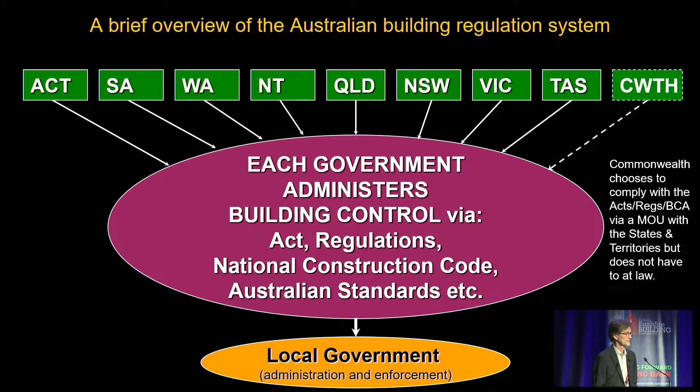Just because we've got a referendum coming up, I thought this was worth adding. The Australian Constitution is really clear about this. It was the Commonwealth of Australia Constitution Act set by the UK Parliament, of course, because Australia didn't exist. And it essentially says that laws that existed within the colonies will remain with the states. So that's the great challenge for us, isn't it?

The National Construction Code has been the great reform of my lifetime, but it's struggling at the moment. It's falling apart. Part of it is this frantic attempt by states to catch up with climate change and other pressures. It's not deliberate, we're not doing it deliberately, but it is a problem. And if nothing else, all of us after this conference can go back to our day-to-day jobs and have some small amount of influence on our politicians to say that we have to treat bushfire as a national issue. It's not a state issue. Bushfires do not care about state rivalry.

So, in terms of 9 different governments and 8 different regulatory schemes, the things I can say for sure occur in every state and territory are that we have 3 prime sections: a design process, a building process, and an occupation process. Pretty much all of us in the room will work in one of those sectors, sometimes 2, very rarely 3. The critical compliance points in law are at the end of the design process.

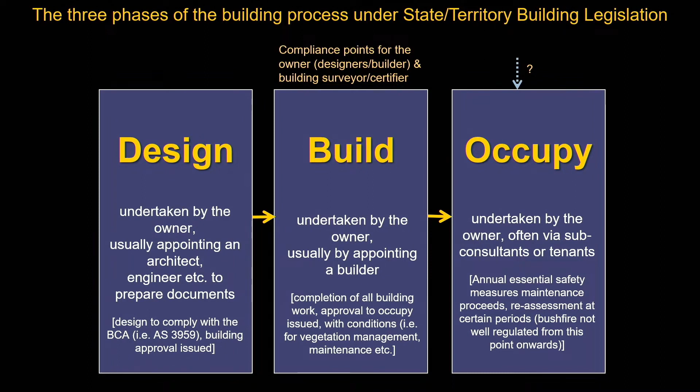At the end of the building process, we have completion of building work and approval to occupy, particularly issue of approval documents, occupation certificates, for vegetation management, maintenance, etc. There are some interesting presentations coming up this afternoon on that, which I'm particularly interested to speak about. Then there's the occupation process, and of course, that's where the big question mark is at the moment. We haven't done much work there. We've certainly never had national requirements for significant retrospective recompliance for housing.

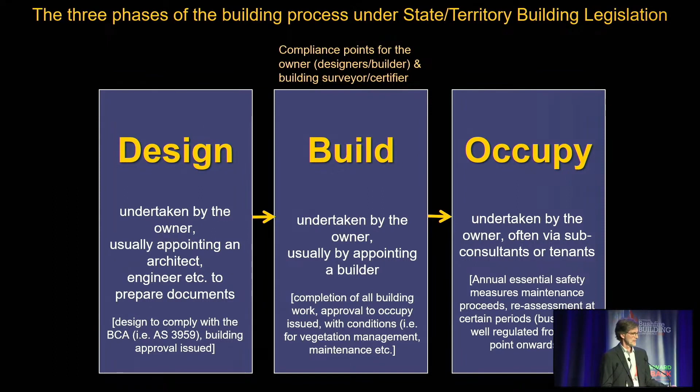Bushfire life safety, that's the prime goal of governments and the National Construction Code. So making sure we keep people safe enough—not so that no life is ever lost, but safe enough—and I'll come back to that.

Then we have private interest insurability. There's a presentation this afternoon from the Resilient Building Council about the insurance challenges we're facing. The insurers are just in the business of making money, and if the fires are greater, the premiums have to go up. For example, New Zealand has had a natural disaster fund for decades because of their earthquake risk.

Maybe we need to start talking about whether we would have a nationally funded insurance scheme. But as soon as I say that, I feel like I'm a socialist and I'm going to be criticised, because that's a political issue, isn't it? But if we all contributed something, even the people who live in cities, to a national disaster fund, like New Zealand has done—they funded the rebuild of Christchurch after the earthquake with that $6.3 billion, I think. They emptied the bank account, but they're now refilling it.

Of course, the last issue is where the Class 9 provisions really start to hit the ground now. This is the public interest building protection, the secondary goal of governments and the National Construction Code. Some of you might have a view that the National Construction Code is really only about life safety, but that's not true. It's fundamentally also about property protection, but only in the public interest.

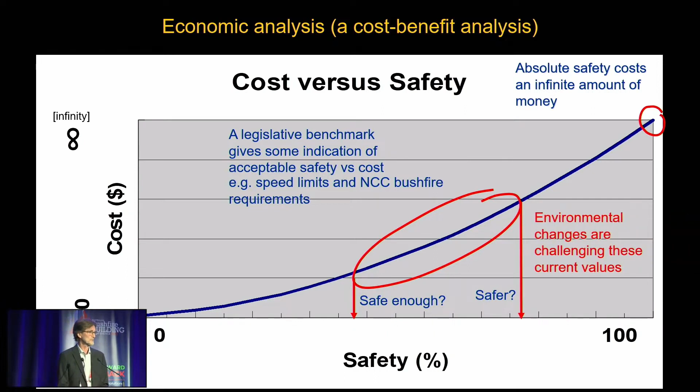Cost versus safety. Again, building codes are not the word safe is a problem. I do a lot of legal work now because of a whole heap of compliance issues. And sometimes lawyers say, is this building safe? And the answer has to be, well, that depends. Compliance, safe means different things, and governments spend all of their time trying to regulate what is safe enough or safer. The reason I put this slide in is because, frankly, environmental changes are challenging those current values.

You might be surprised to know, but some of you will already know, that most of the Australian standards that we've got in the building code, in fact that we've got nationally, were developed from the last 50 or 100 years of data. We look backwards to work out what the future should be. And guess what climate change is telling us? That doesn't work anymore. So one of the things we spent a lot of time at the Australian Building Codes Board discussing at board meetings is, what is the factor you would add to those codes for climate change? And if you have an answer, please go grab me in the break, because we have no idea.

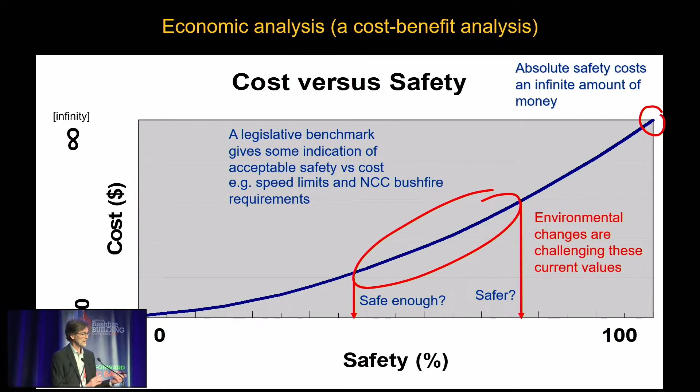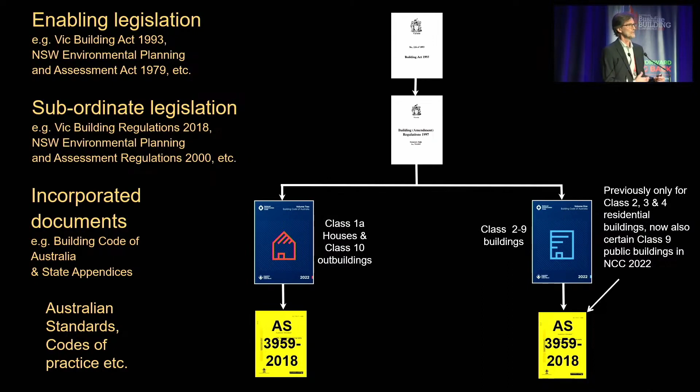So in every state or territory, you have an Act, Regs, BCA and standards. 3959 sits awkwardly there at the bottom of the table, given most of us spend a lot of our time dealing with this code, but it's important to remind ourselves about that. The building code used to previously only deal with housing. And again, one of the challenges of emerging regulatory issues is that we start with where the problem is. Losing thousands of houses in bushfires was a problem, and we weren't losing thousands of hospitals or schools.

We occasionally lose hospitals or schools, fortunately without loss of life usually. That actually goes against another policy problem, because if you lived in a cyclonic area, you'd know from watching world news that if a cyclone or hurricane is going to occur and you're in an old house, you need to move to a safer building, because the local shopping centre or sports stadium is between 10 and 100 times more structurally secure than a house.

In bushfire, we flipped that, haven't we? If you're in a 3959 house, you should not drive to your local school, because that was probably built to no bushfire standards, or your local hospital, or every other public building. That's a real challenge for regulators because subconsciously - I've spoken to Justin Leonard and others about this - sometimes people in a bushfire fill their bath with water and go to the middle of the house, because their subconscious is telling them this is what you do from what you've seen on Hollywood movies about cyclones. In a cyclone, probably the smallest room is the safest part of the house. But in a bushfire, that could be the worst possible spot.

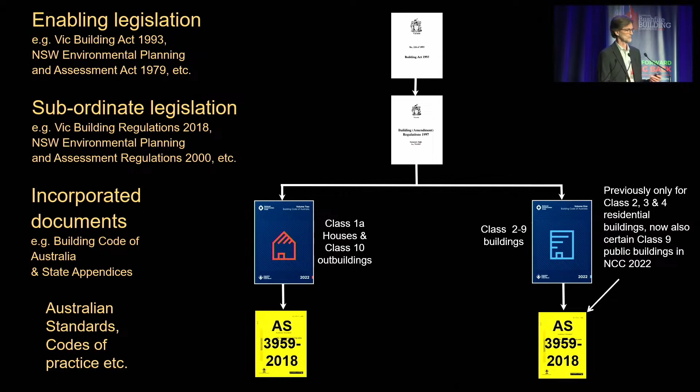So the performance-based NCC - I should say the National Construction Code series is the correct title. I'm going to use NCC and BCA interchangeably. We're going to talk about Building Codes Volume 1 and 2 and then the Plumbing Code. It's correct to use both terms unless you're certifying something. If you're certifying compliance, you can't use NCC unless you actually believe you comply with the Plumbing Code - you should use Building Code of Australia Volume 1 or 2. But like most building things, we've developed a shorthand term and call it the NCC. Strictly speaking, that's a series of 3 documents.

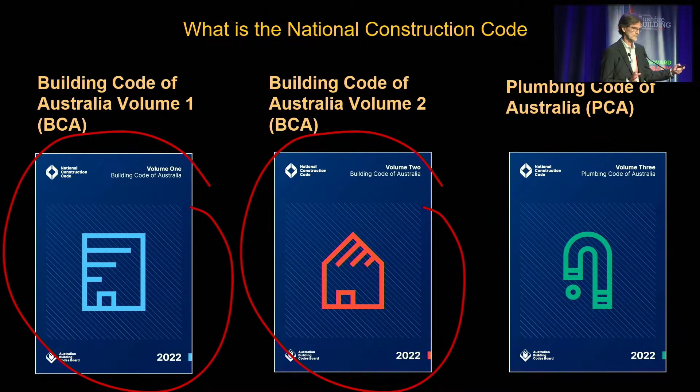So it's a performance-based code. The NCC includes prescriptive, what we call deemed-to-satisfy provisions. The beauty of deemed-to-satisfy provisions is that they guarantee us compliance at law, because we can't define safety. Does that sound good? Not if you live in the AS 3959 world. But it's also true that not one Australian standard in the National Construction Code series is mandatory. Australian standards are not mandatory - they're one of the optional deemed-to-satisfy solutions. But of course that's where all of the industry lives, because that's where the production line, code-compliant world is. That's the most important part of the building code for a builder, a subcontractor, a product supplier, and there's a few in the room. But actually the building code is performance based, and I'll talk about why that's the case.

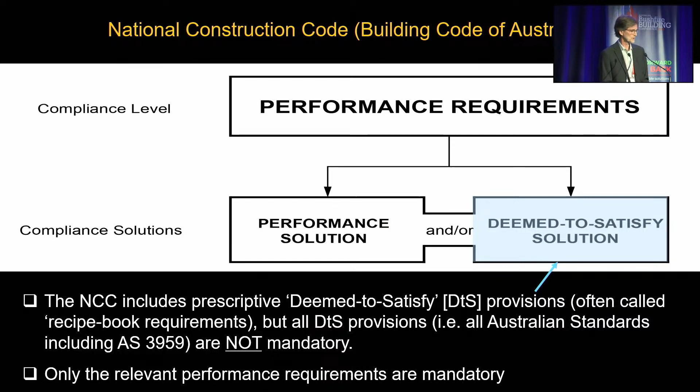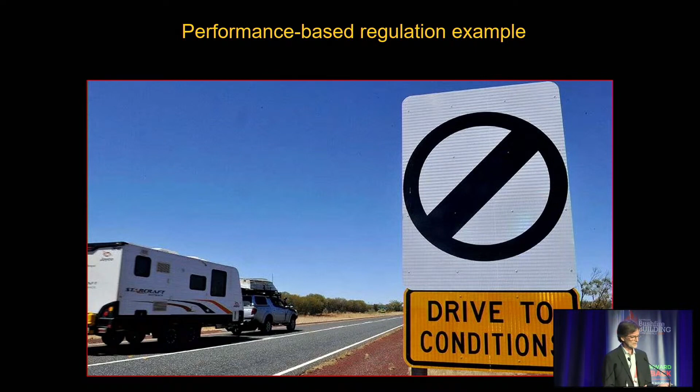So there's the best performance-based regulation I know of - Peter, if you're still there, that's the Stuart Highway. The reason I use this is because the Northern Territory has had 2 goes at performance-based speed limits. Both times they failed, and I particularly love this picture - that's about a 20-year-old example. There actually already is a verification method in the building code, but it doesn't work, it doesn't apply to Class 9 buildings, so we can't use that.

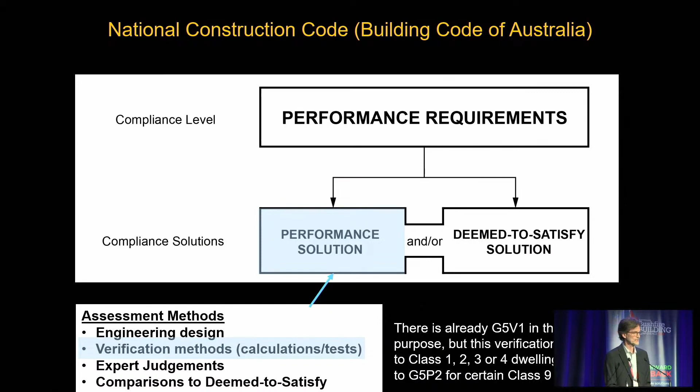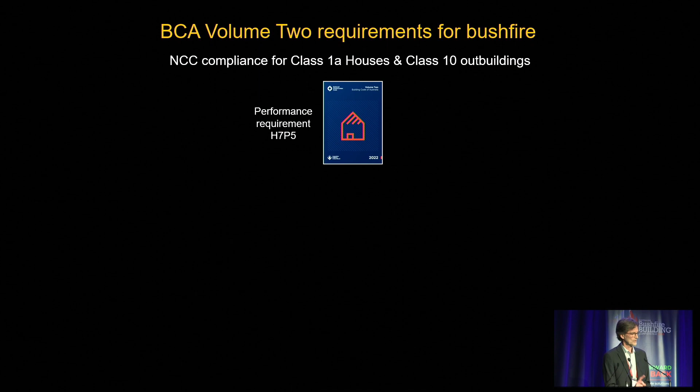So here's how this all comes together. For Class 1 houses and Class 10 outbuildings, we've got performance requirement H7P5. I'm not going to spend much time on this because I've got a lot of slides to get through, but you can look this up yourself. The requirements for Class 1, 2, 3 and 4 parts of buildings are the same, 4 criteria, but of course you can follow AS 3959 and you don't have to assess any of that. The assumption is that if you follow the standard, you're deemed to comply with those words. Whether you do or not is not for the design construction process to deal with - that's how deeming provisions work. Just think of it like driving down the road with a blood alcohol level of 0.049, in a car that's just roadworthy, in the fog. That's compliant.

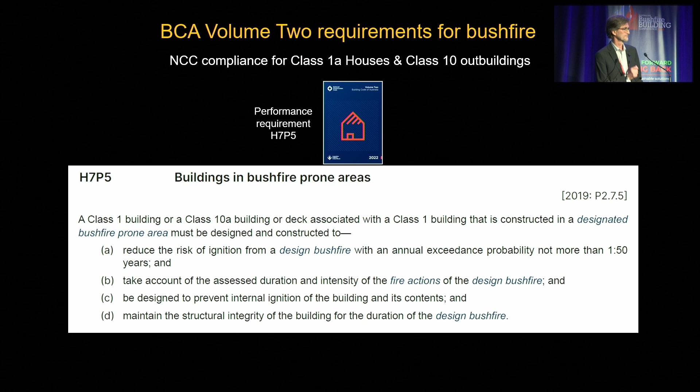And again, typically it's one of those: a performance solution or AS 3959. In my experience, most of the industry only proceeds to a performance solution if 3959 compliance can't be achieved, and that's a good practical outcome of industry common sense, I think.

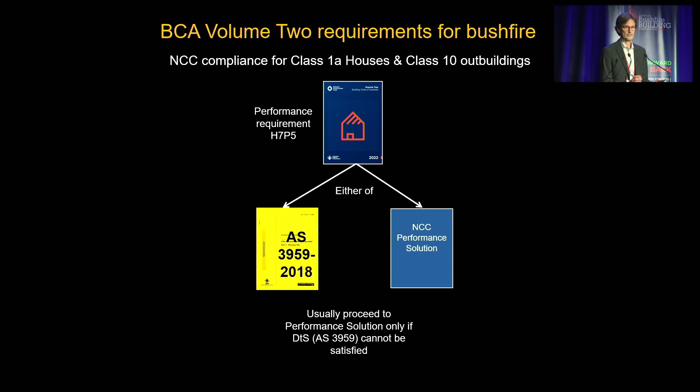Again, for exactly the same provision, I don't need to go through the words in detail, they're the same as the Class 1A performance requirement, but it's G5P1. I should have said at the start, 1st of May 2023 was the new National Construction Code 2022 edition, full of some significant reforms. Two of the others are disability access into dwellings and 7-star energy efficiency.

And those things won't make bushfire worse, will they? Think about that. We're going to have wheelchair accessible houses and we have to line them with more and more combustible materials to get to 7-star. So this is that challenging policy framework we live in at the moment.

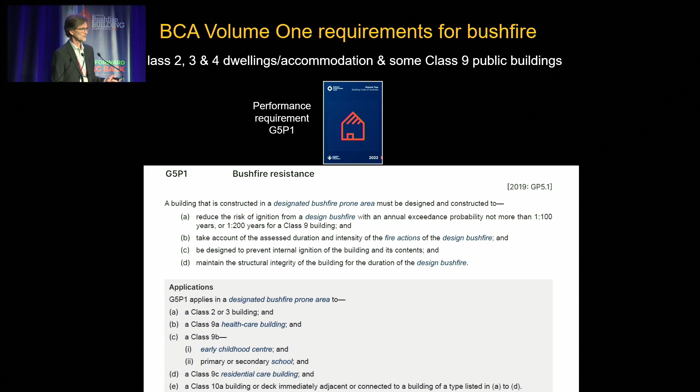And again, the same outcome, 3959 gets you there under the National Construction Code, or a performance solution if you can't. But this is the new bit, G5P2. And again, it's not the purpose of this presentation to go through this in detail, but you'll see there are some very challenging issues for how a public building would operate before, during and after a bushfire.

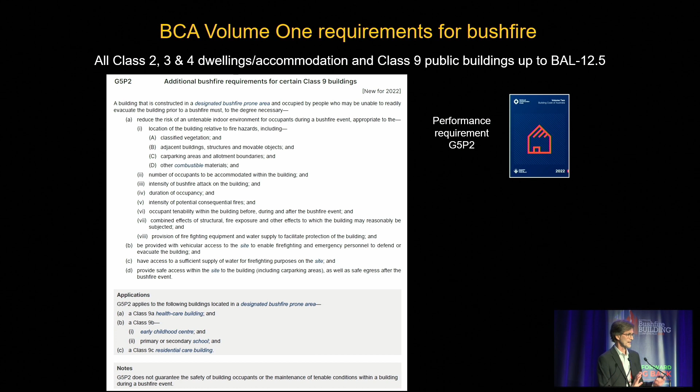You'll see down the bottom it applies to Class 9A healthcare buildings, so hospitals, low care, high care, aged care, kindergartens, primary schools, secondary schools, residential care buildings. So not all Class 9 buildings, not universities, for example. Primary and secondary schools, but not universities. It's a narrow group, and this is the start of the regulatory evolution process.

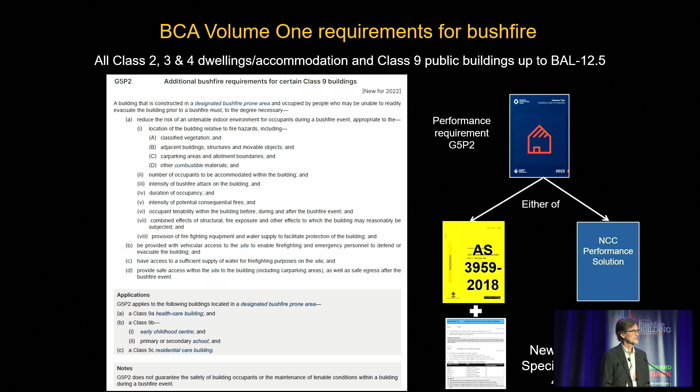And again, if you're up to BAL 12.5, a pragmatic solution to a problem we don't really have other solutions for yet. If you can get a public building on a BAL 12.5 site or less, that's a heck of a start. And if you do that, 3959 for a hospital - it's not the code, just think about that. The Australian standard developed for houses is being applied to a hospital, plus specification 43, which covers all of the other issues.

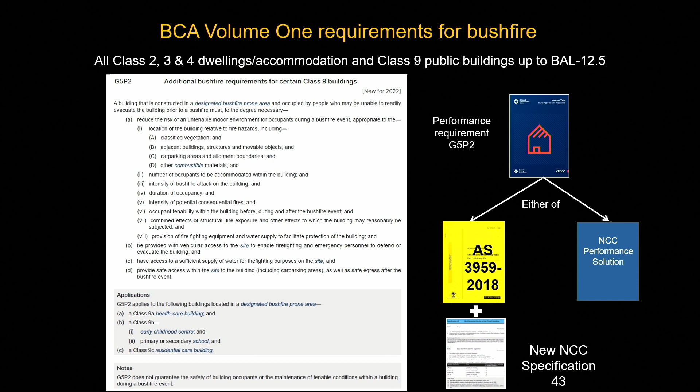Separation distances, and tries to pick up all of the limitations of 3959, not because 3959 is not a very good document, but because it wasn't designed for hospitals. And then of course the last bit, the bit that's frankly scary because we're at the very start of this journey. If you've got a site that's BAL 19 or higher and you want to build a Class 9 building, you have to go to a pure performance-based design, a BPAD level 3. This is underpants on the outside stuff.

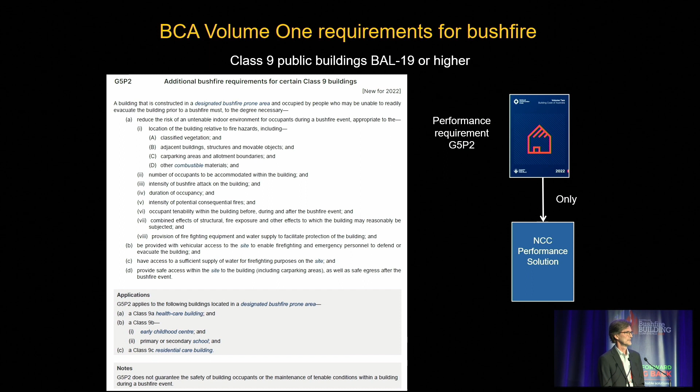This is really tricky. And I would say, as we go through this journey, the way we can protect ourselves is to use documents like the Australian Fire Engineering Guidelines, which tell us, as designers - whether you're a BPAD level 3 or a fire safety engineer - to consult widely with authorities, particularly the fire brigade. Consult widely, that's the way we protect the system.

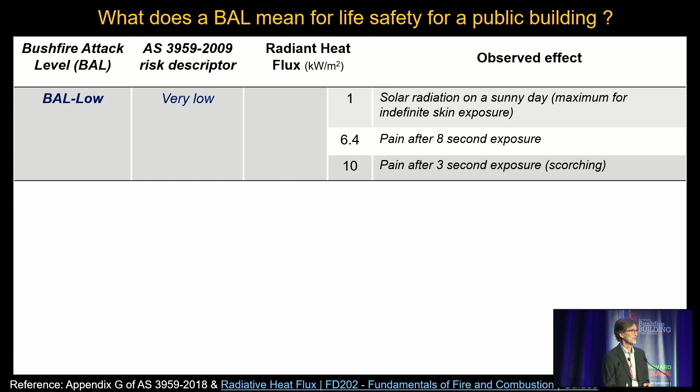Again, most of you will know this off the top of your head, but BAL 19, 16 kilowatts, blistering of skin after 5 seconds. So this is that dilemma around hardware solutions for buildings as opposed to software solutions for people in the buildings. So people being in buildings or near buildings is a very challenging design scenario.

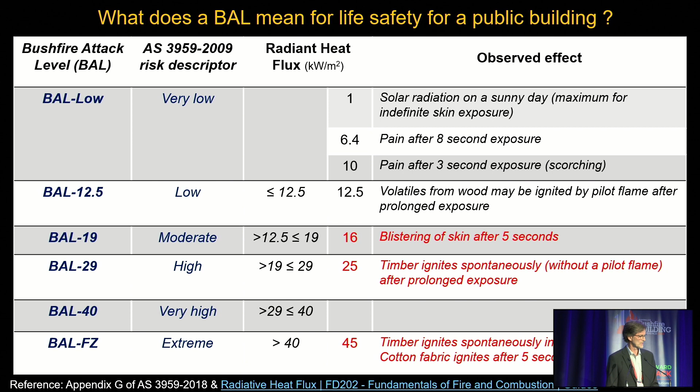So why has this occurred? Governments don't usually regulate before they have a problem, but climate change is making this worse. Technical standards and regulations evolve over time, so don't misunderstand the building code as a perfect solution for every problem. It can never be that. It's the start of a minimum standard approach.

That's why we actually have a performance-based code to allow for innovation and future-proofing of buildings as best as possible. Performance-based regulations require increased education skills, auditing, enforcement, increased compliance costs—if it's harder to do, it's got to cost more money—and also increased authority consultation.

I know fire brigades around the country are trying to get their head around this issue. Frankly, being a firefighter at the moment is one of the toughest jobs you can imagine, because if you're in the country, you've got bushfire. If you're in the city now, you've got a whole range of changing fuel technologies driving all sorts of issues. As a fire safety engineer, I spend a lot of time now on EV vehicles and what we're going to do about those sorts of fires. And we haven't even got to hydrogen fires yet.

Again, the greater need for regulation over the life of a building—that theme runs through the rest of the program. So is it a real problem?

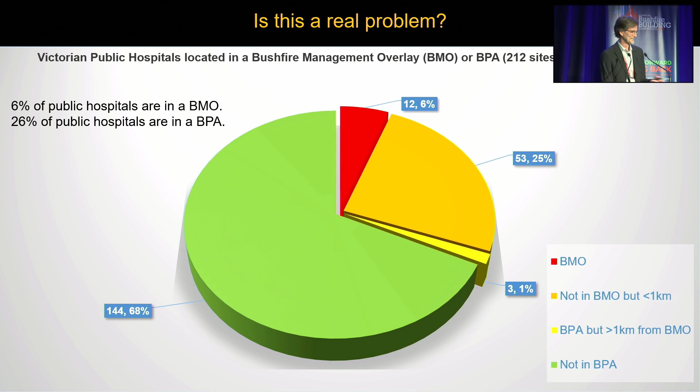This is a slide I added just last night. We're doing an audit in Victoria of registered state government hospitals, and it turns out there's 212 sites, and 1 in 3 are in bushfire-prone areas. These are existing hospitals. So this issue around building resilience is real. It's not just about, everyone wants to take a picture of that one. It's going to get me in trouble, that slide, I know it is, but it's the truth, and it's all in the public domain.

We're going to talk through the next half a day and tomorrow about building resilience. But in my view, the building code regulates for building resilience, but can never regulate for community resilience. Well, not never, but if you think of 100 houses in a community, how many of those are actually compliant with the current building code? One? So over time, it might take 30, but potentially 60 years to increase the stock in a whole community to get to the point where every building is compliant with the current standard.